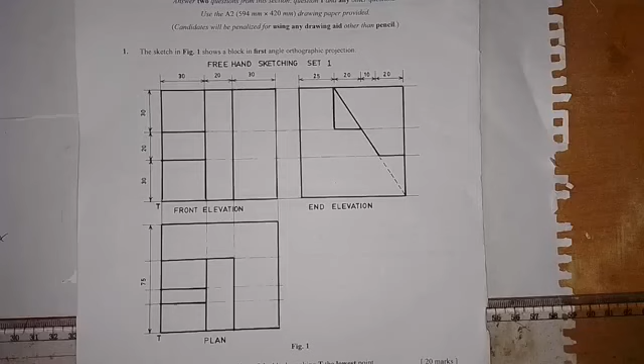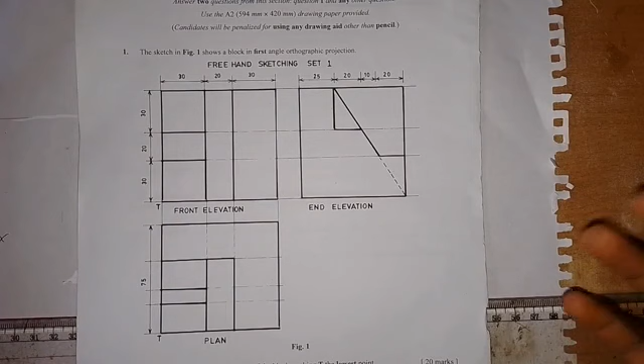Here we want to work on this problem, and we are going to convert these orthographic views into isometric view, as these views are given in first angle projection. You can see here that this is the front elevation, this is the plan, and this is the end elevation. So what we have here, this is the lowest point T, so we need to take note of that.

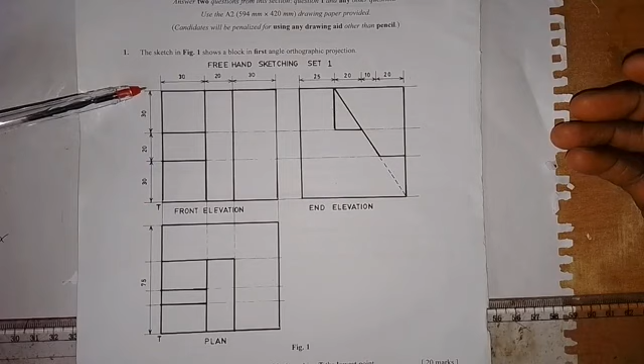So let me talk about the dimensions that we have here. For the plan, distance from here to here, the width, is 75, and for the front elevation we have the total height to be 80 millimeters. From here to here is 30, from here to here is 20, from here to here is 30, and also the length of the front elevation is also 80 millimeters. This is 30, 20, 30. So this is the front elevation.

So to solve this particular problem, what we are going to do first is to construct an isometric cuboid. So that's the first thing I'm going to do. Then we bring out the features. So I'm going to do that now. Together we'll do it. Then I will show you how you can put the features that we see here there.

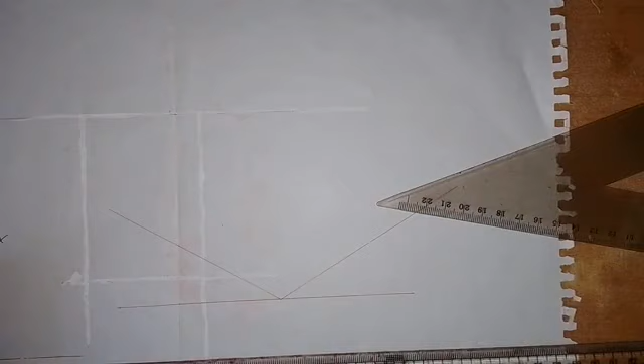So let's start. The first thing that we need to do here is to draw a horizontal line like this, and then we draw a line with the 30 degrees set square. We draw a line in this direction, and then we also draw a line in this direction like this. Alright, so this is the lowest point T. So that's the lowest point.

As I said, we are going to construct a cuboid here. For the cuboid, the height, as we have it, is 80 millimeters. So we take a measurement of 80 millimeters here. So this is 80, and the length is also 80 millimeters. So we take 80 millimeters, and the width, as we have in the plan, is 75 millimeters. So we have 75 here, so this is 75 millimeters.

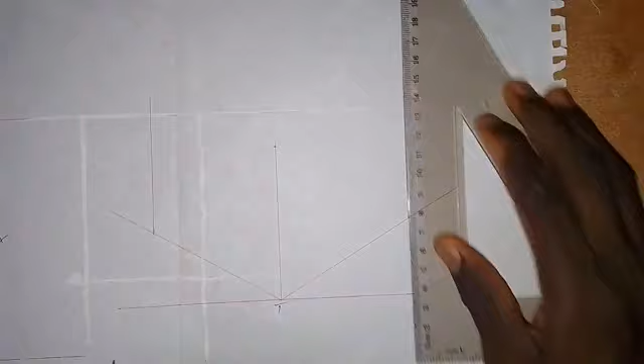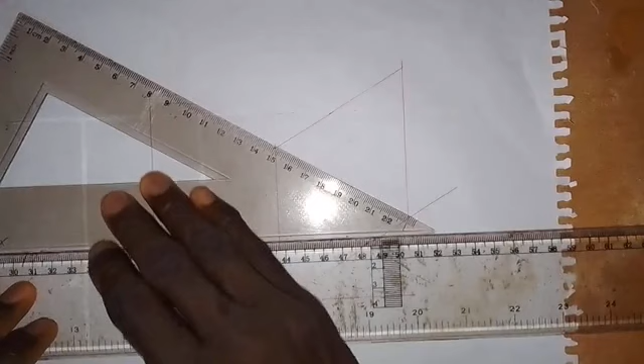So at this point, we are going to erect a vertical line. We draw a vertical line here at this point, and we also come to this end here and draw a vertical line. Alright, so I will transfer this point onto this line. Okay, so I transfer it onto this line like this, and then also transfer it onto this line like this. So I need to make this a complete vertical line.

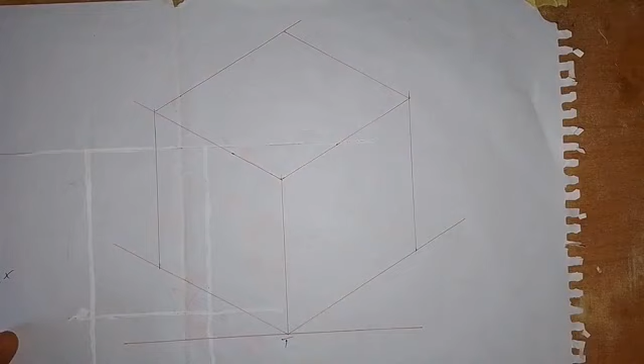So we also transfer. Okay, and let me bring it down so that we can see it. So I also need to transfer this point to this end here. So we have a cuboid in place now, as you can see. The next thing that we are going to do is to bring out the features. So let's start like this.

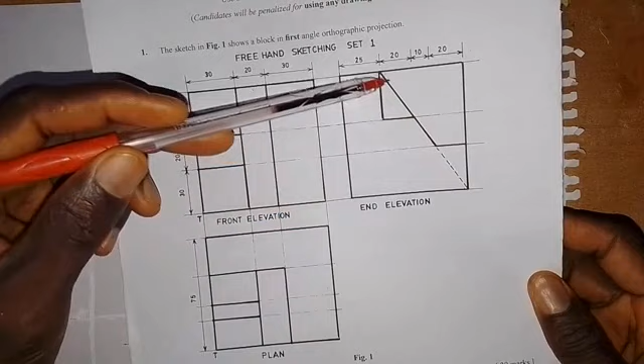In the front elevation we have this rectangle, and we have this rectangle, but this rectangle that we have here is not a normal rectangle. You can see this line here in the end elevation, so it's going to be slant like this. And with this rectangle here we have the plan, we have this L shape in the plan. So let's bring out this L shape in the plan with this rectangle that we have in the front elevation.

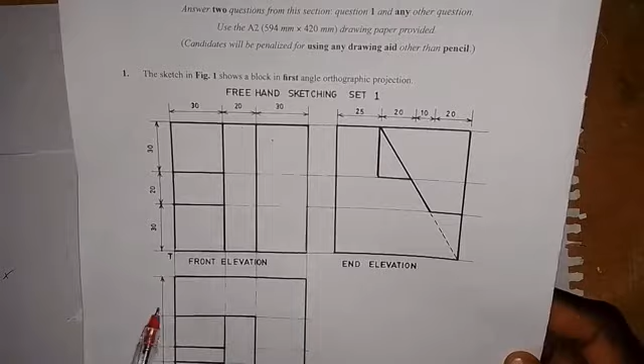As we have, the distance from here to here is 30. And then from here to here, as we have in the end elevation, it is 25. So distance from here to here is 25 millimeters. So what I will do now is take a measurement of 30 millimeters for the rectangle that we have in the front elevation. So this is 30 millimeters.

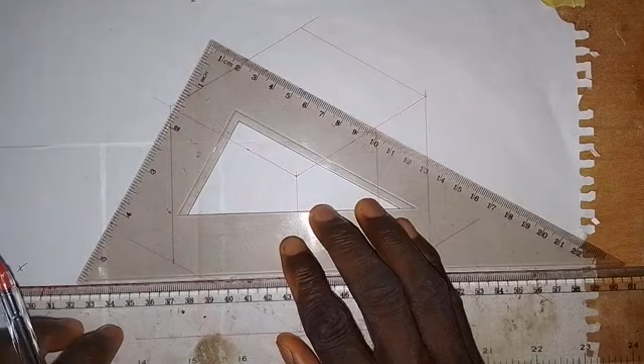Then I will come to this end here. From this point, I'm going to take a measurement of 25 millimeters so that we can bring out that L shape in the plan. So here I will draw a vertical line like this. Okay, then I'll transfer this one to this side. Then I will transfer this to this side here, and we'll try to balance this square.

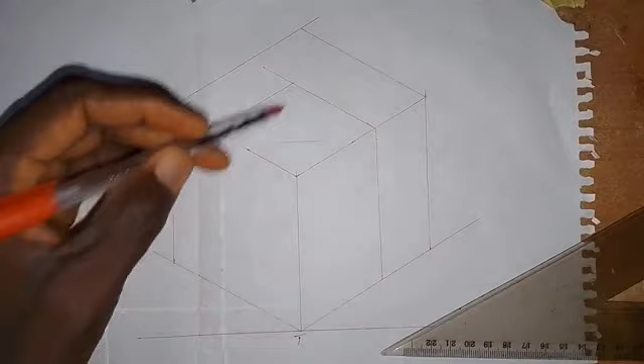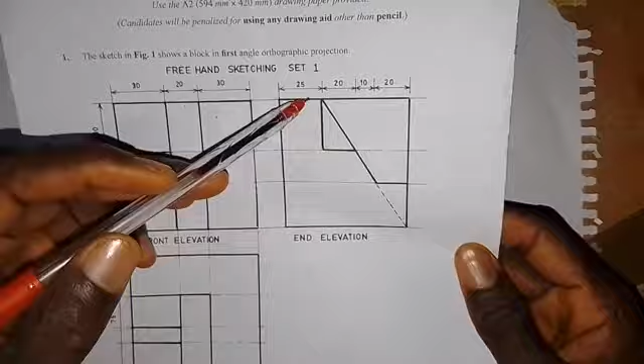So we have the L shape that we have in the plan, as we have here. So this is the L shape, and this is the rectangle. The rectangle that we have here is on this part, as we have it in the front elevation. Okay, so the next thing that I'm going to do: this line that we see here in the end elevation, I'm going to join this point. I will connect it together with this point like this.

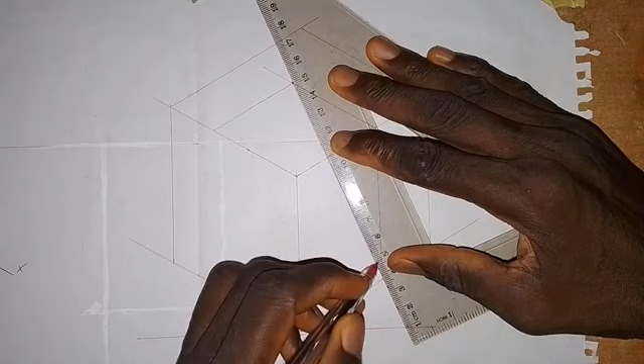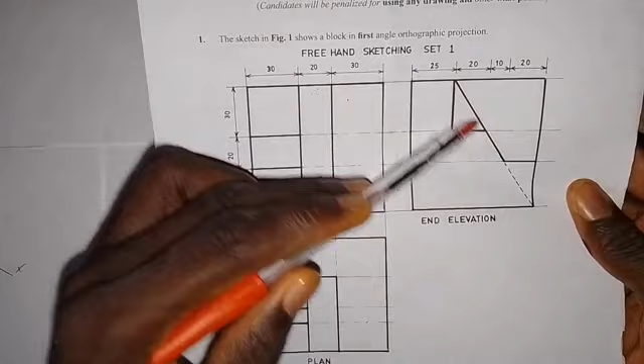Okay, so I'm not going to make it thick now. So let's first of all look at it in this way. So then this rectangle that we have here, as I said, this is how it is slant. It looks like this in the end elevation, while it looks like a rectangle in the front elevation. And also in the plan, it gives us a rectangle as we have it here.

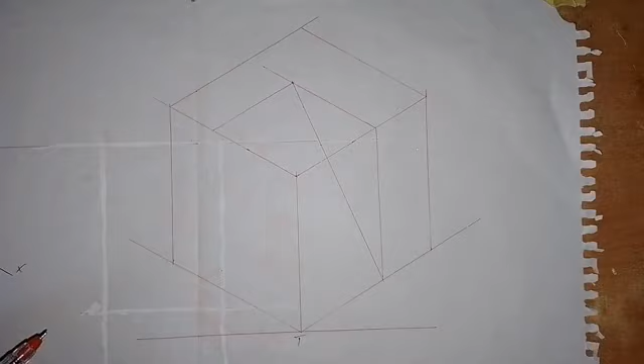So the distance from here to here is 20. So from this point here, I will take 20 millimeters. This is 20 millimeters here. So I will also come down here and take the same 20 millimeters. So this is 20 millimeters.

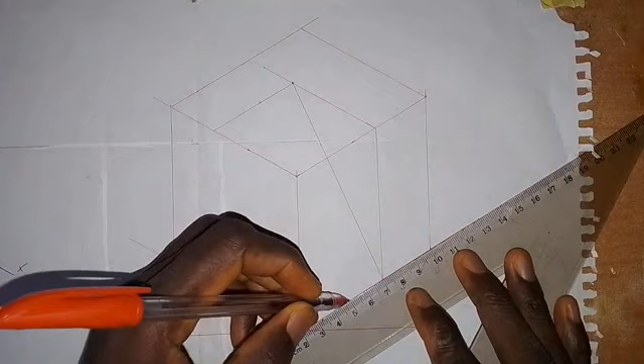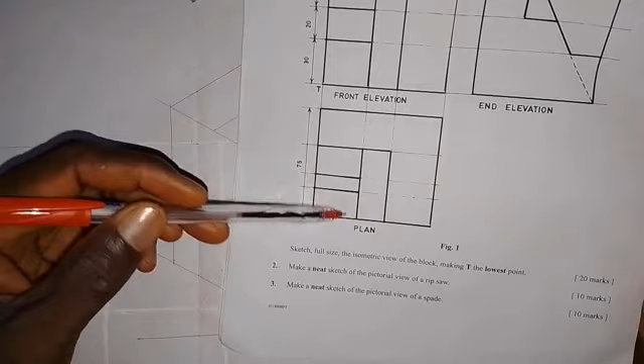So I'm going to join this together, but I will not make it thick, for a reason. I will join it together just for you to see it. So in the front elevation, it will give us a rectangle. Also in the plan, it will give us a rectangle. Now if you look at what we have here in the plan, we have a rectangle here. And in the front elevation, we also have the rectangle here.

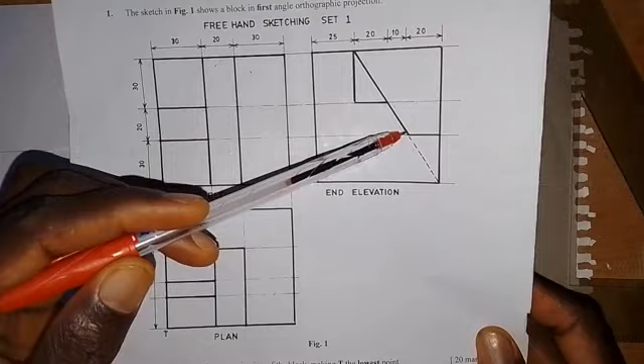This rectangle is in the plan. There is something on top that we are going to draw. As I was saying, this is the plan. So we have this rectangle in the plan. And if you come to the end elevation, you can see this shape, that distance from here to here is the same as the distance from here to here in the plan for this rectangle. So what they want us to do is that at this point here,

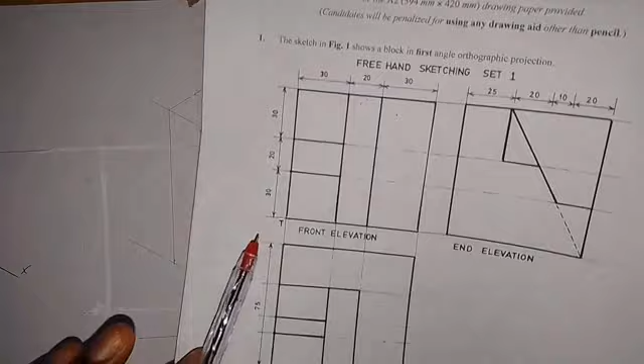if we take a measurement, from here to here is 30, as we have from here to here is 30, also from here to here in the plan is 30 millimeters. As you can see here, this is 30 millimeters. So what we are going to do at this point is to draw a vertical line, and we are going to form a shape that you are going to see now. So I will draw a vertical line at this point like this.

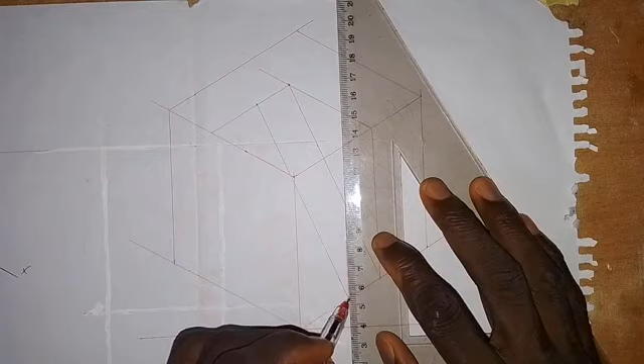Okay, now the height from here to here, as we have it in the front elevation, is also 30 millimeters. So I will come onto this line here and take a measurement of 30 millimeters. This is 30 millimeters here. So I'm going to transfer this 30 to this side. Then I'm going to take it forward a bit, like this.

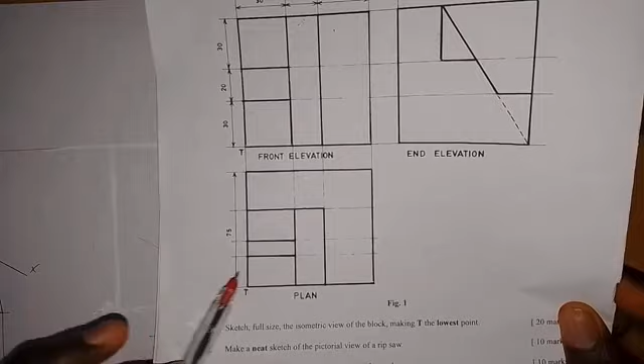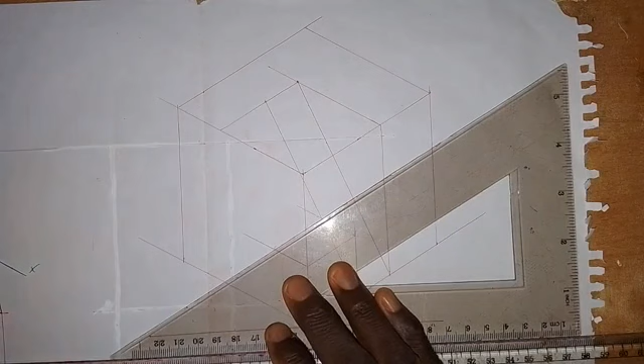And come here also, I will take it forward to bring out that top rectangle. So this rectangle here, I need to bring it out. The distance from here to here is 20 millimeters. So I'm going to take a measurement of 20 millimeters on this part here. So this is 20 millimeters. So here I will draw this line in this direction. I'm not going to make it thick yet.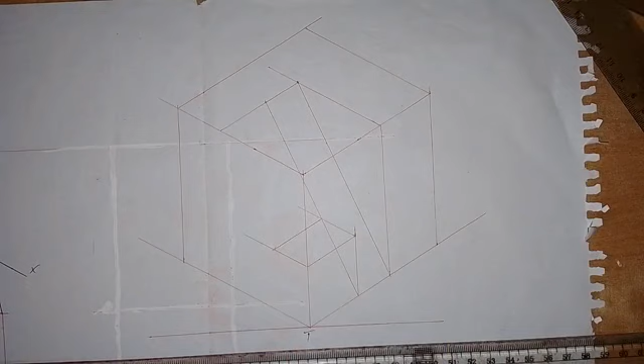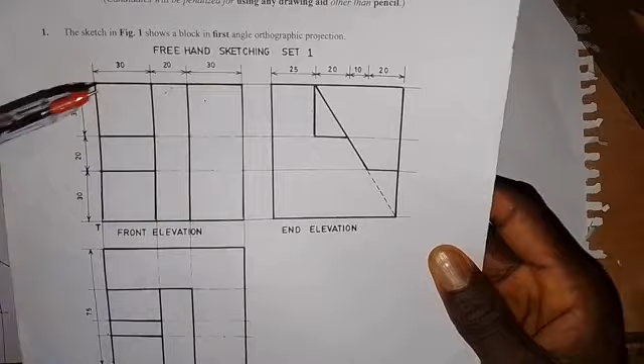For me to get this work done, it took me time. So it's an examination question, I think it's GCE last year, 2022. I think that was the one they did in November 2022. So I just penned this, but today I looked at it, okay, let me try, and I was able to get it.

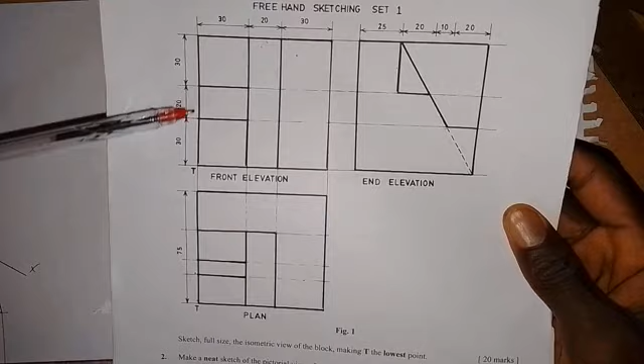Okay, so now the next thing, looking at this rectangle that we have here in the front elevation, and this is how we have it in the plan. So in the front elevation, we have it slanting from here to here. So from here to here, for this rectangle, we have 20 millimeters, and distance from here to here is 30, that same 30 that we have from here.

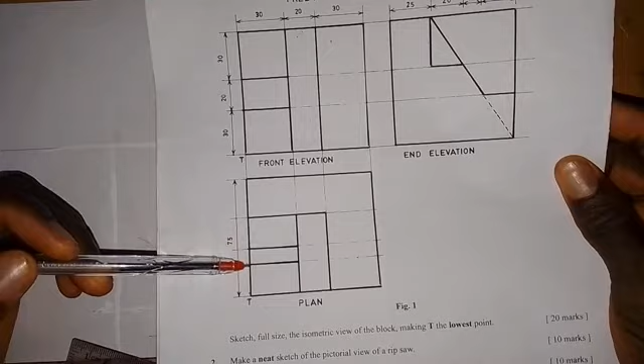Okay, so what we are going to do here is that I will take a measurement as we have it in the plan. So distance from here to here is 10 millimeters. This is what we have here as 10 millimeters in the end elevation. Talking about the distance from this point, if I draw a vertical line here to a vertical line here, we have it to be 10.

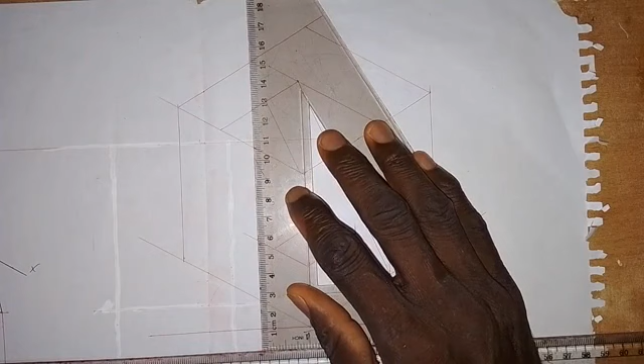So I'm going to take a measurement of 10 millimeters from this point. 10 millimeters from this point, so this is 10 millimeters here. So I'm going to draw a vertical line like this.

Okay, so now the height, as we have here, is 20. So I'm going to take a measurement of 20 millimeters. From this point, I will take 20 millimeters up. This is 20 millimeters here. So I'm going to join these together like this.

So if you look at this line that we have here, they are almost the same. Okay, let me see. So if I draw from here to here, okay, so we have the rectangle as you can see it here.

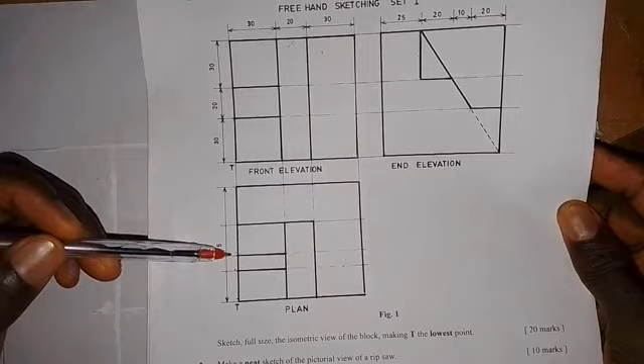So the next thing that we are going to do is that we have another rectangle here. And they said that from here to here is 20, as we have it from here to here, 20 millimeters. So that is how we have it as a rectangle in the plan. So I need to draw a line from this point, like this, and also I will come to this point here and draw a line, so it may fall on the line that we have drawn before.

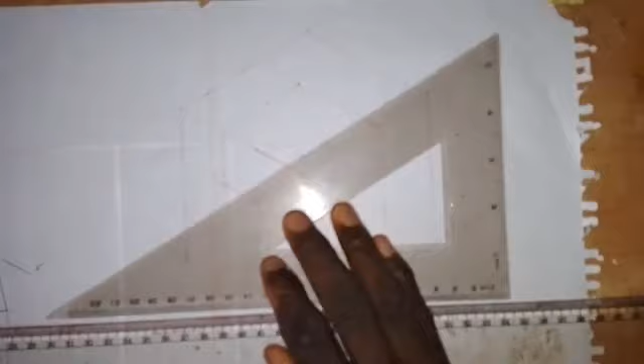So I'm going to take a measurement of 20 millimeters from this point. So this is 20 millimeters here. Here I will draw a vertical line, so it even coincides with this point. Then also this 20, I will transfer it to this end here. So by the time I join this and this together, they'll be at the same point. So we have it like this.

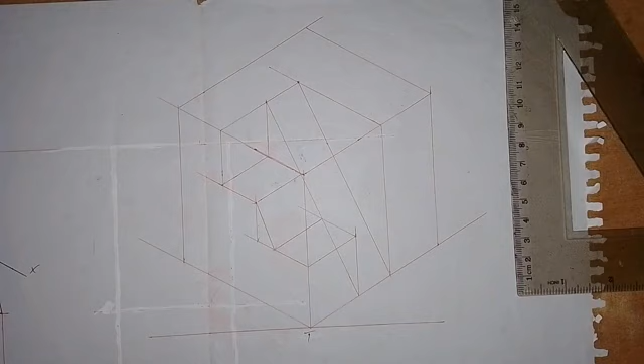Okay, so looking at what we have here, this shape is somehow funny. Okay, I have completed it. So what I just need to do now is to bring out the outlines. So I'm going to pause the video, then I will bring out the outline, and then we look at it together. So I'll pause the video and do that right now.

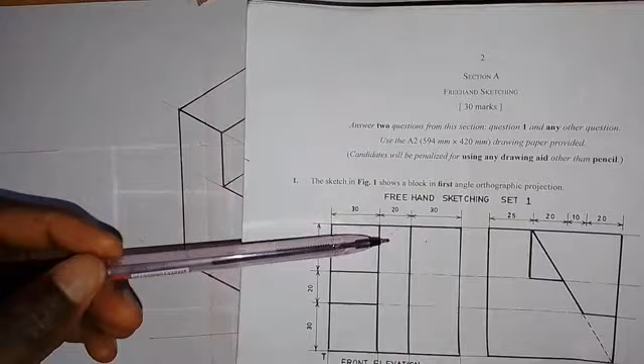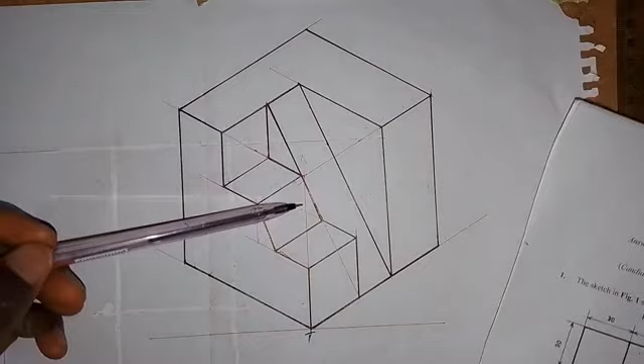Alright, so this is the object. This is how it is to look. Okay, so let's look at the parts as we have in the question. So this rectangle that we have in the front elevation, this is it here, and this rectangle, we see it like this. And then this rectangle here, or a square, so we have it here, and also this rectangle that we have here, this is it. So we have it here in the front elevation.

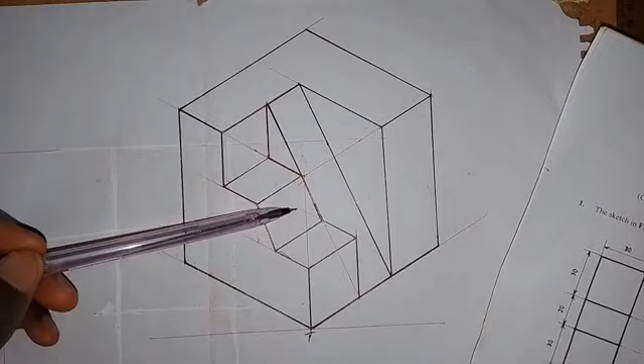So we have that of the front elevation complete, and then in the plan, this L shape that we have here, this is it on this surface. And then this rectangle here is for this particular rectangle. This is how it will look in the plan. It will not give us the true shape. And also this rectangle that we have here, we have it here. So that is for the plan.

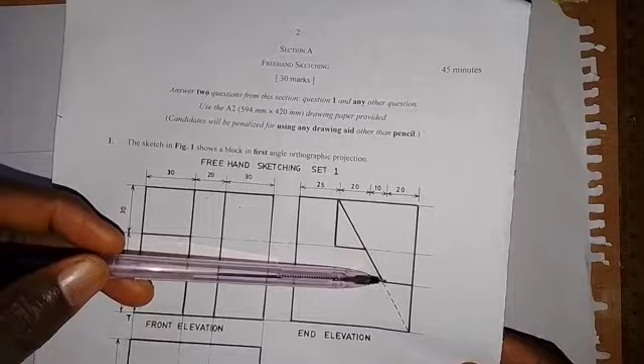And then looking at the end elevation, this shape as we have here goes like this, then it goes like this. So this short dashed line that is hidden, the part of this rectangle that we do not complete here, this is the line, so it is hidden from us in the end elevation. So that's why they show it hidden here.

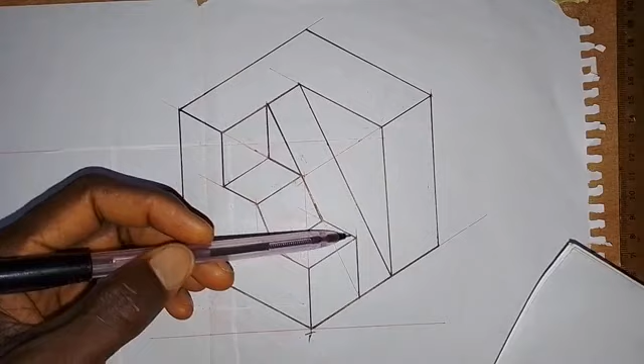And this shape that we have here, so it goes like this. So with this one that we have here, it is merged with it and placed around here. So that is how we have it in the figure. So every part that we have in the given views is all here. So it's as simple as I've done it here. Practice it, and when you practice it, you become a master at this question.